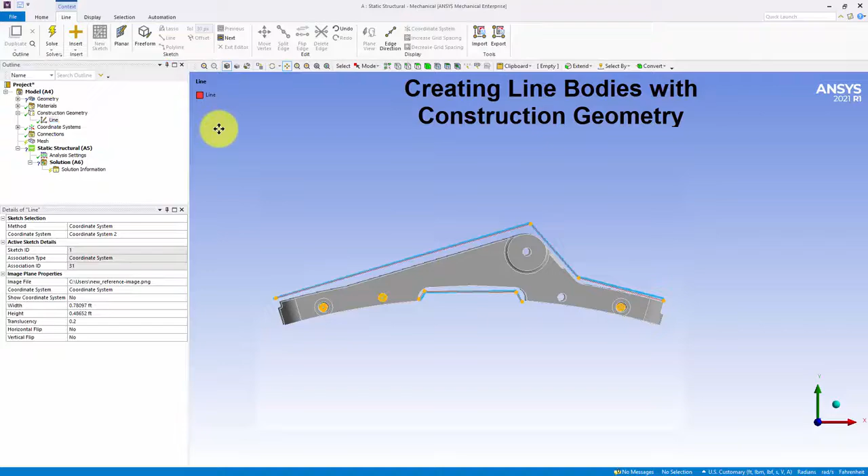Cable-type line bodies now use higher-order elements by default. Specifically, the program-controlled element order setting for cables is the quadratic Cable 280 element, rather than the linear Link 180 element.

ANSYS documentation has a new Workbench Technology Showcase guidebook that presents a collection of real-world problems that include project and input files. Each example includes a solved project for you to use in tandem while studying the examples.

You can now import coordinate system data points from an external data system onto the elements of your model in the form of element orientations. Included is the new mapping option, Quaternion, that interpolates the orientations in the quaternion space rather than directly on the Euler angles.

There are new geometry and part object options available to freeze and unfreeze the mesh of all geometry parts or selected parts of your model.

The Material View pane now enables you to compare materials.

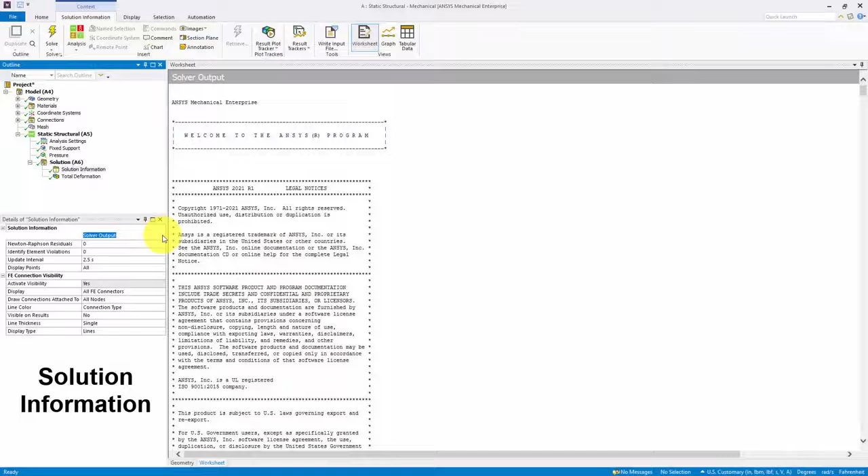The new Solution History option for the Solution Output property of the Solution Information object enables you to display solution performance and result data via the worksheet using the Solution Tracking and Result Tracking tabs.

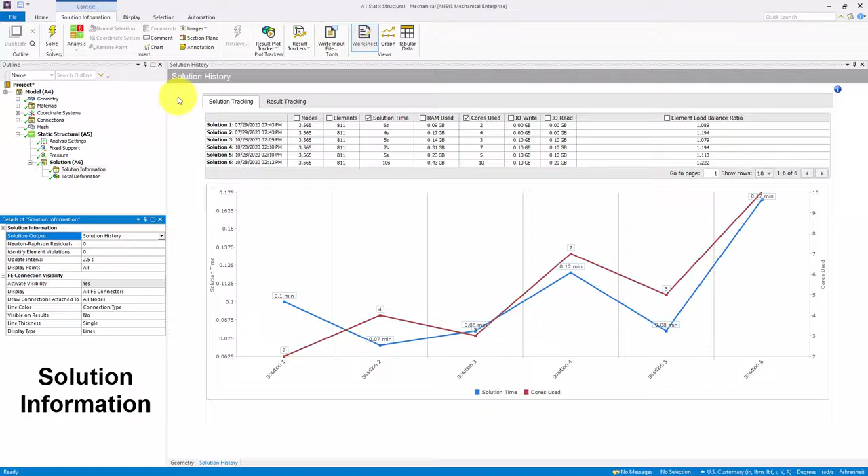The Solution Tracking tab displays solution times, the computational resources used, and the number of nodes and elements for each solution. The Result Tracking tab displays the result's minimum and maximum values and the number of nodes and elements for each solution.

The Mechanical Scripting pane has a new recording option that enables you to generate or record APIs based on the actions you make in the application.

And a new debugging tool. This feature includes tools such as breakpoints, tooltips about variables and script content, a watch window to view expressions, and a feature to debug active expressions.

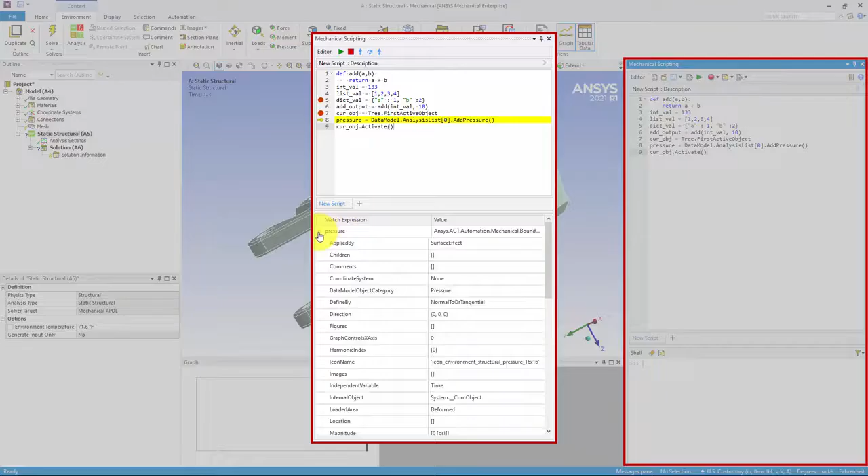You can now export superelements that are generated by a solved condensed part object. And using the new bottom-up substructuring approach, these superelements can then be imported into a different mechanical session using imported condensed part.

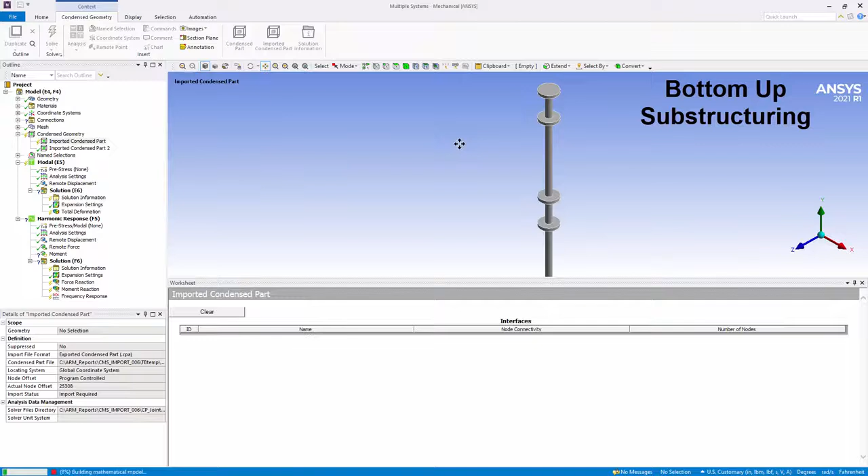Once imported, you can generate nodal named selections for each interface that can then be used to define connections and/or boundary conditions. Imported superelements can then be connected to the rest of the model before performing use-pass for the analysis.

Using coupled field harmonic and coupled field modal analyses, Mechanical now supports piezoelectric coupling between electric and structural physics.

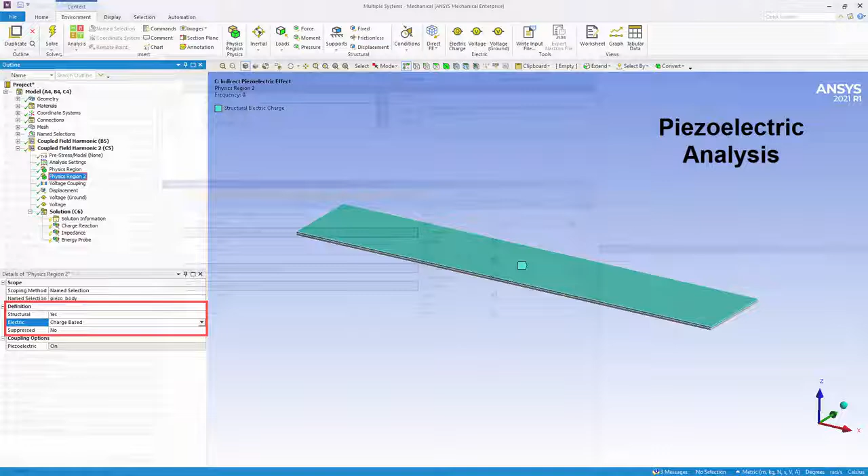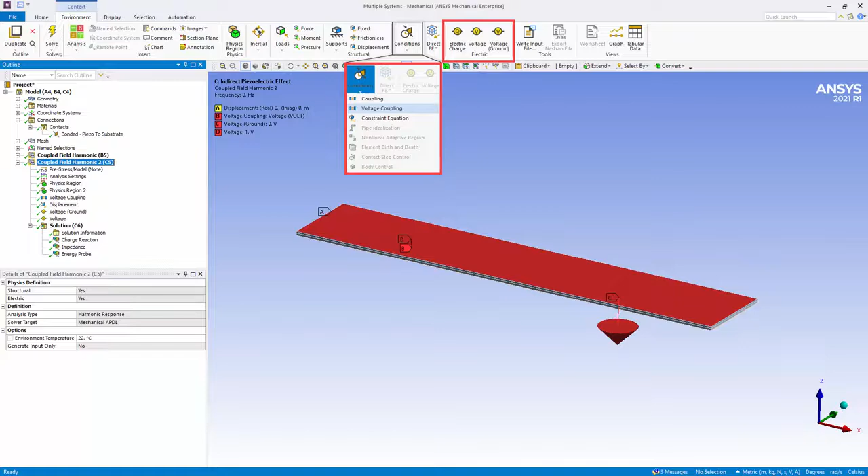Analyses are also supported in engineering data with the new anisotropic elasticity, anisotropic relative permittivity, and piezoelectric matrix material properties, as well as support for electric capacitance for contact conditions, electric charge, voltage, and voltage ground loading conditions, as well as the new voltage coupling boundary condition, probe results for charge reaction and impedance.

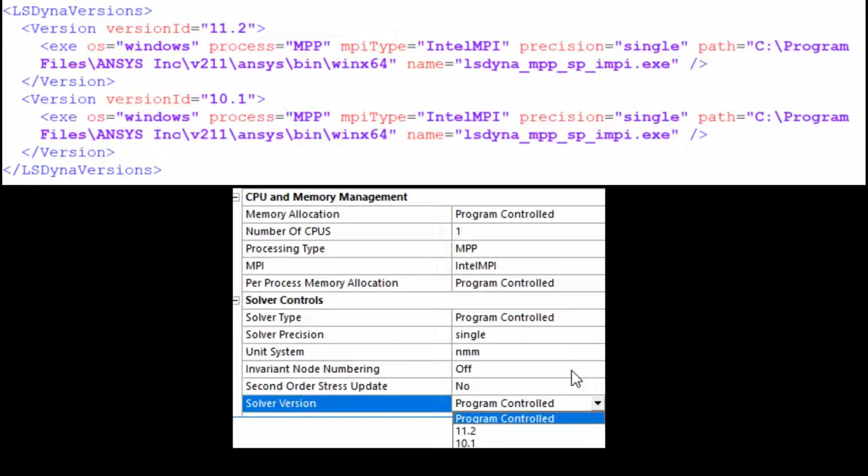For LS-DYNA analyses, a new solver version property is available. The default version is 11.2. As illustrated here, you can now modify a system-generated configuration file to make additional solver versions available in the solver version property.

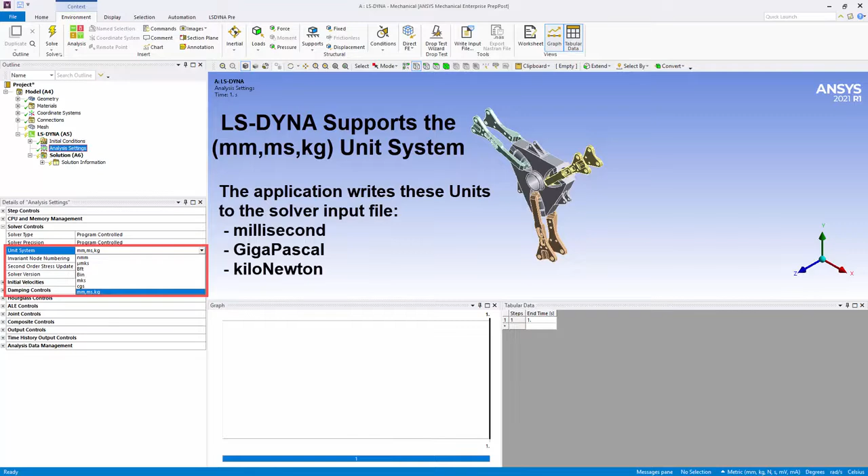The solver input file is written using the new millimeter, millisecond, kilogram unit system, which features millisecond as the time unit, gigapascal as the pressure unit, and kilonewton as the force unit. The results are displayed in the GUI-defined unit system.

There's a new workflow for short fiber composites that enables you to predict the thermomechanical behavior of parts made of short fiber reinforced composites. This workflow combines Material Designer for the material characterization, the new injection molding data system in Workbench that imports injection molding simulation results, and Mechanical for the setup of the finite element model.

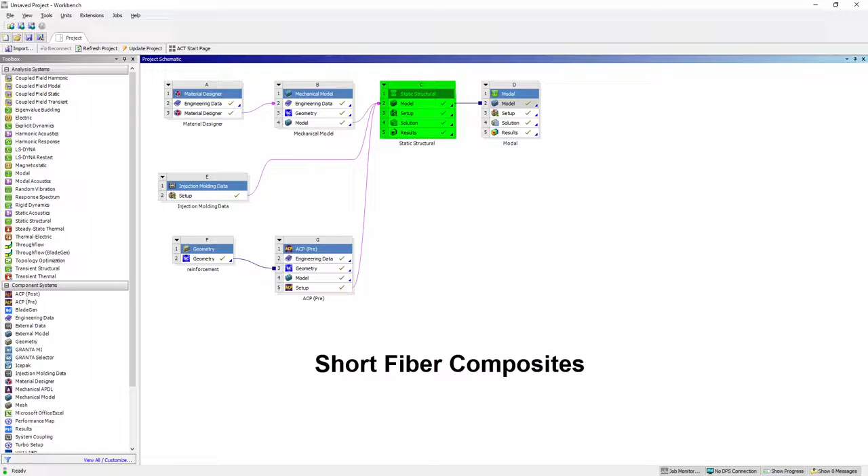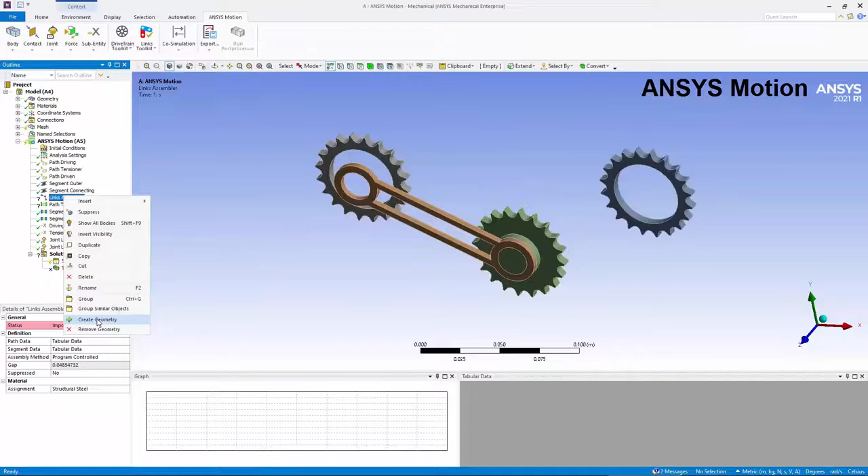ANSYS Motion enables you to model multi-body dynamic systems with rigid and flexible components, contacts, joints, and springs. A drivetrain toolkit helps to automate the creation of gear assemblies. A links toolkit automates the creation of repeated systems like chains, tracks, and belts.

This is just a portion of the updates in Release 2021 R1. See the application release notes for a complete list.